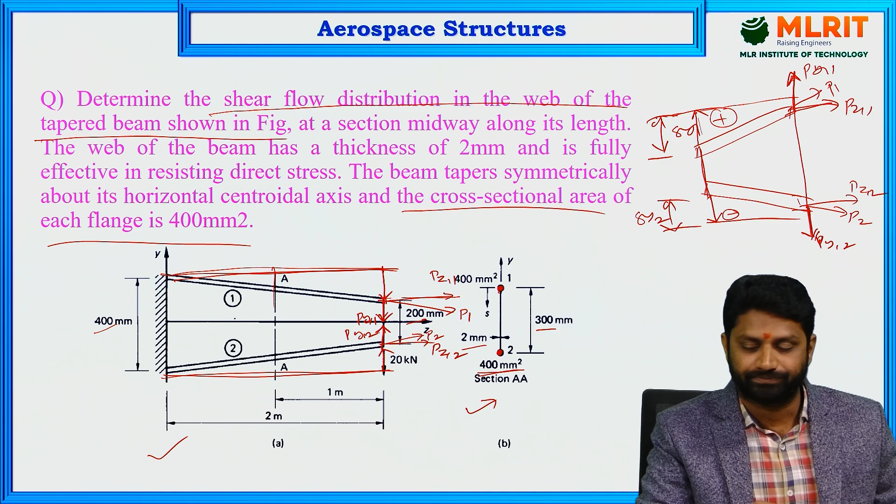In the derivation, Py1 is in the upward direction and Py2 is downward, whereas here Py1 is in the downward direction and Py2 in the upward direction. So those are the changes from the derivation, and plus or minus changes may be there in the formula. So let's look into this problem.

So the internal bending moment and the shear load at this section A produced by the externally applied load are, respectively: if you look at the bending moment Mx at that section, here we have section 1 and the load given is 20 kilonewton, which gives a moment about AA. So the bending moment Mx equals 20 into the perpendicular distance, which is 1 meter. So 20 into 10 to the power of 3 into 1 meter.

If you convert into mm, you get another 10 to the power 3. So you can write this as 20 into 10 to the power of 6 Newton mm as the bending moment. So 20 into 1, that is 20 kilonewton meter, and converting, you again get 20 into 10 to the power of 6 Newton mm. And the vertical shear load is given acting downwards, so we have to assume Sy equals minus 20 kilonewton.

Then look at the direct stress distribution formula: Ax plus By, where A equals My Ixx minus Mx Ixy divided by Ixx Iyy minus Ixy squared, and constant B is Mx Iyy minus My Ixy divided by Ixx Iyy minus Ixy squared. Substitute the product of inertia as 0 and the horizontal shear load as 0, so that constant A becomes 0 and constant B becomes Mx by Ixx.

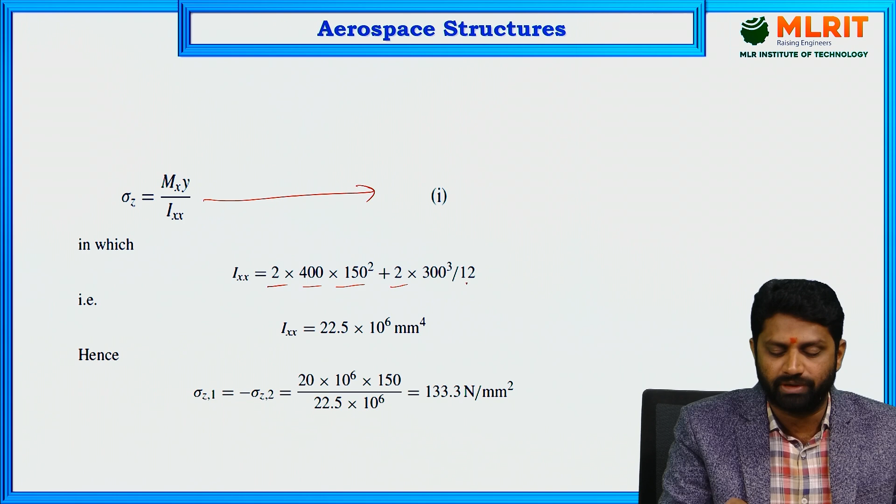Next you write it for panel 1-2. Panel 1-2 has a thickness of 2 mm, which is the width we consider, and a depth of 300 mm. So apply the bd cubed by 12 plus A y bar squared formula. So 2 into 400 into 150 squared for the booms, and for panel 1-2, 2 into 300 cubed by 12 plus area 2 into 300 times y bar squared, where y bar is 0 because the centroid of the total figure and the centroid of panel 1-2 coincide on this axis.

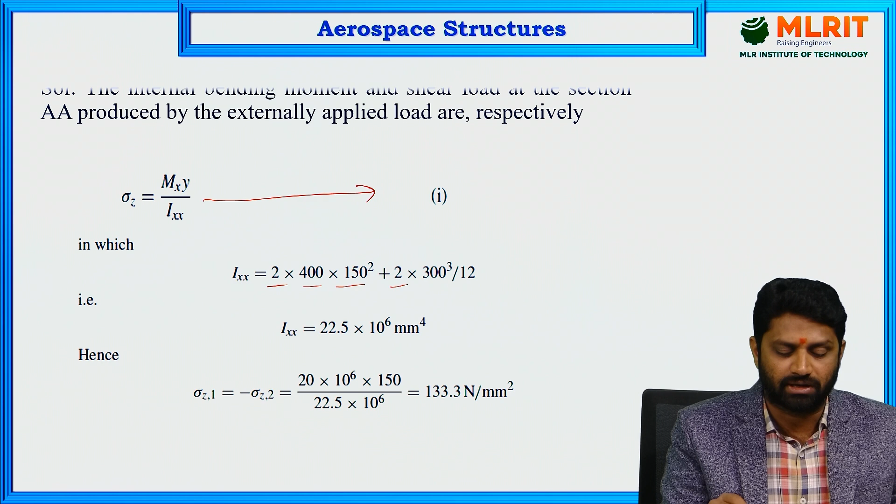Therefore the moment of inertia Ixx equals 22.5 into 10 to the power of 6 mm to the power 4. Once you get Ixx, substitute in the formula: sigma z equals Mx, which is 20 into 10 to the power of 6, into y, the maximum distance from the neutral axis, 150. Total depth is 300, so half is 150, divided by the moment of inertia, 22.5 into 10 to the power of 6.

Calculating this, you get 133.3 Newton per mm squared, so sigma z1 equals minus sigma z2 equals 133.3 Newton per mm squared. Sigma z1 relates to the horizontal component of the flange 1 force, and sigma z2 to the horizontal component of axial load P2. These are the bending stress resultants. Once we have sigma z1 and sigma z2, we can get the other values, so let's calculate Pz1.

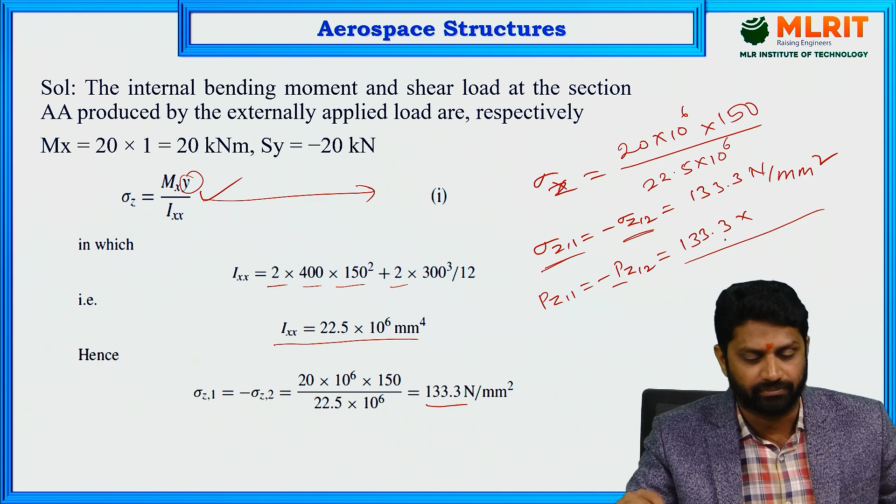So PZ1, that is equals to minus PZ2, you can get as 133.3. Already we have stresses, so you can multiply by the area to get the force resultants: 133.3 and the area. The area of each stringer is given as 400 mm square, which you can substitute, and then you get PZ1 equals to minus PZ2, and it comes to 53320 newtons. Okay, so that is PZ1 and minus PZ2.

Right, now coming to shear, the shear load resisted by the web. We have seen the formula: SYW equals SY minus PY1 minus PY2, where PY1 you can write as PZ1 into delta y1 by delta z, and PY2 as PZ2 into delta y2 by delta z. Okay, so that is the formula which we wrote from the previous case.

Now for this case, the formula slightly differs. If you look at the diagram and the taper, the vertical component PY1 will be downwards, whereas PY2 will be in the upward direction. Delta y1 is a downward taper and delta y2 is an upward taper. So the formula modifies here, and instead of the minus sign, for this case you will get the plus sign for delta y2, because earlier that was negative and now it will be positive.

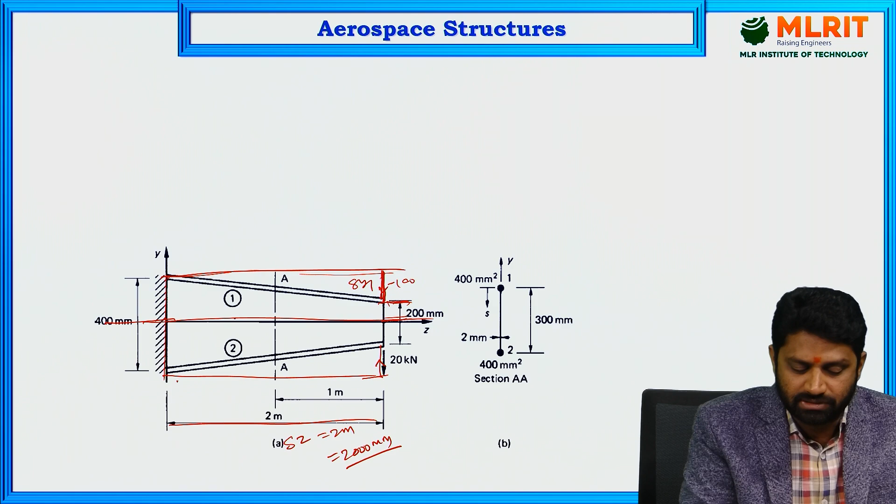This taper is taken downwards, so you consider this distance as minus, whereas for delta y2 the taper is in the upward direction from the horizontal axis, so you take it as positive. So delta y1 by delta z equals minus 100 divided by 2 into 10 to the power of 3, and delta y2 by delta z equals plus 100 divided by 2 into 10 to the power of 3. You get minus 0.05 and 0.05.

When you substitute these, you get SYW, the web shear load, as minus 20 into 10 power 3 plus 53320 into 0.05 plus 53320 into 0.05, which gives minus 14668 newtons. Once you get this in the web, you can start finding the shear flow distribution.

The formula for shear flow distribution, we know it: qs equals minus SYW divided by IXX, into the integral from 0 to s of t y ds plus the sum of Br yr. So this is the formula we have. Now we are substituting minus SYW, where SYW is minus 14668.

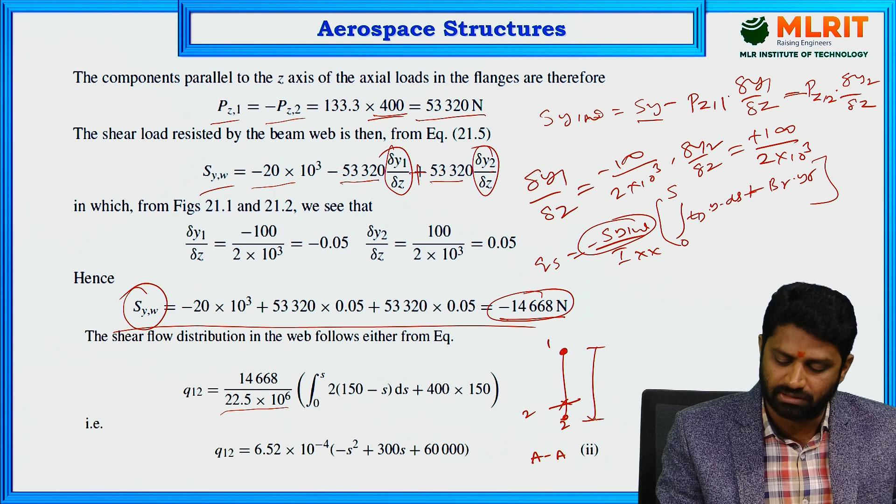So minus into minus becomes plus 14668 divided by IXX, which we got as 22.5 into 10 power 6, and then 0 to S, and this is important, the distribution 0 to S. So this is 1, this is 2 in the AA section. AA, if you look at it, the thickness is 2 mm and the total depth is 300 mm. So half of the distance will be 150 mm.

Okay. So we'll consider the distribution S1 like this. When you consider the S1 distribution like this, from the centroidal axis you have to find what is this distance. So the depth would be 150 from here to here, and from 150 you have to subtract this S1 so that you will get the distance from the centroid up to the section S1. So this distance would be 150 minus S1. Therefore in place of Y you have to substitute 150 minus S1. And thickness is nothing but 2 mm.

So 2 into 150 minus S into ds plus BRYR. So boom area is nothing but 400 and its Y distance from the centroid is nothing but 150. Okay. So now integrating this, 2 you can take common outside, and then multiply. 150 becomes 150 into S, and S becomes S square by 2. And then 2 into 150 becomes 300, you get 300 into S, and then you can multiply this 400 into 150 as 60,000.

So you got Q12 distribution, that is equal to 6.52 into 10 to the power of minus 4 into minus S square plus 300S plus 60,000. So this is a distribution. Now we are going to substitute the boundary conditions and find out what is the shear flow at 1 and at 2. Since S1 is starting from boom 1, at 1, S1 equals 0. When you substitute S equal to 0 in this equation, these terms become 0, and you are going to get Q1 equals 39.1 Newton per mm.

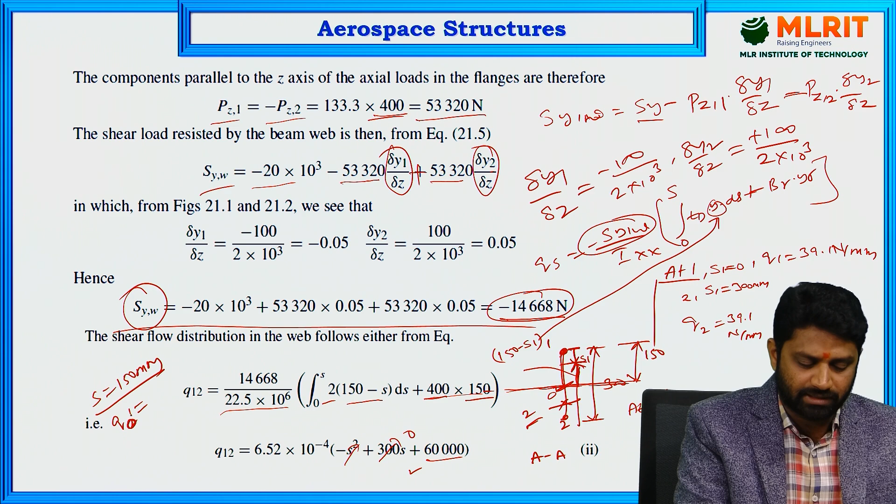Okay. And at 2, S1 is nothing but 300 mm. When you substitute this 300 mm here, again you are going to get Q2 equals 39.1 Newton per mm. And if you want to calculate at the center, that is O, you can substitute S equals 150 mm, so that you are going to get Q naught at the center. So at the center you are going to get the maximum shear flow, and that is equal to 53.8 Newton per mm.

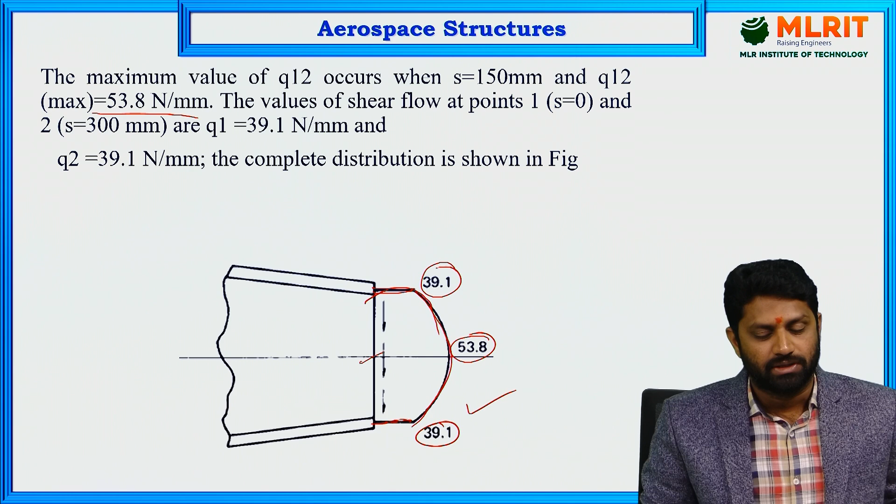So at 1 the shear flow is 39.1, and at 2 also the shear flow will be 39.1, and these are linear. And at the center you are going to get the maximum shear flow, that is 53.8, and this gives a parabolic curve, so the parabolic curve can be drawn here like this. So this is the shear flow distribution in the web, the complete web shear flow distribution, and that is the tapered wing spar shear flow distribution.

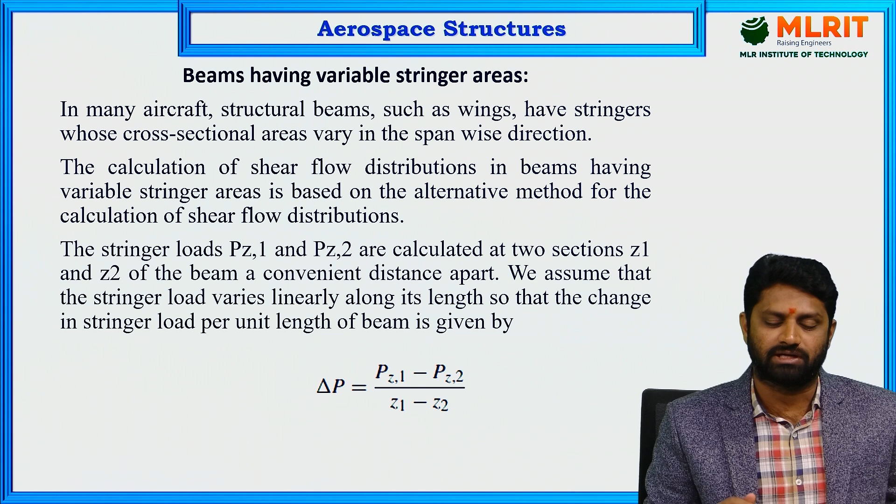Okay. So next, sometimes beams will have variable stringer areas. In the previous problem we considered the stringers are similar, with the same area. Many aircraft structural beams such as wings have stringers whose cross-sectional areas vary in the span-wise direction. So the calculation of the shear flow distributions in beams having variable stringer areas is based on an alternative method.

So the stringer loads PZ1 and PZ2 are calculated at 2 sections, that is at the Z1 section and the Z2 section of the beam, a convenient distance apart. We assume that the stringer load varies linearly along its length, so that the change in stringer load per unit length of the beam is given by delta P equals PZ1 minus PZ2 divided by Z1 minus Z2. We consider delta P like this, and then we extend the analysis like the previous procedure.

Okay. So that's all from today's class, and in the next session we'll look into the bending effect in stress analysis.